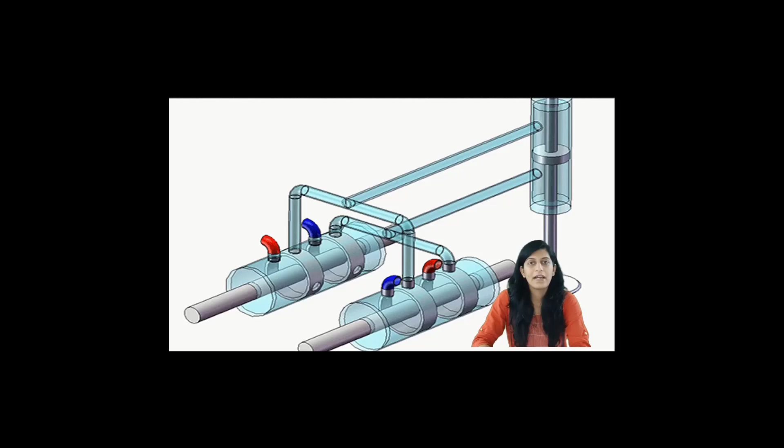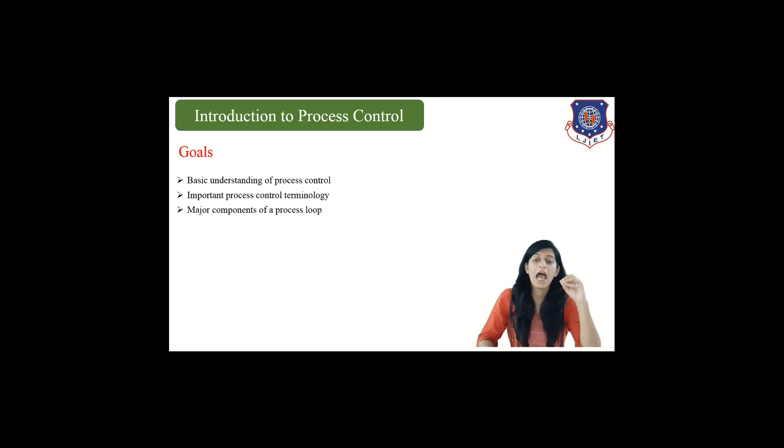Let's start our today's topic, Introduction to Process Control. First we must understand the purpose behind learning this course. Once you complete it, you will understand the basic knowledge of process control, important terminologies related to it, and the major components of the loop. These are the outcomes from this topic, so let's start today's session.

We are dealing with process control and instrumentation. The subject name itself depicts that it is a combination of two different topics: one is the control part and one is the instrumentation part. So we are here discussing initially the process control part.

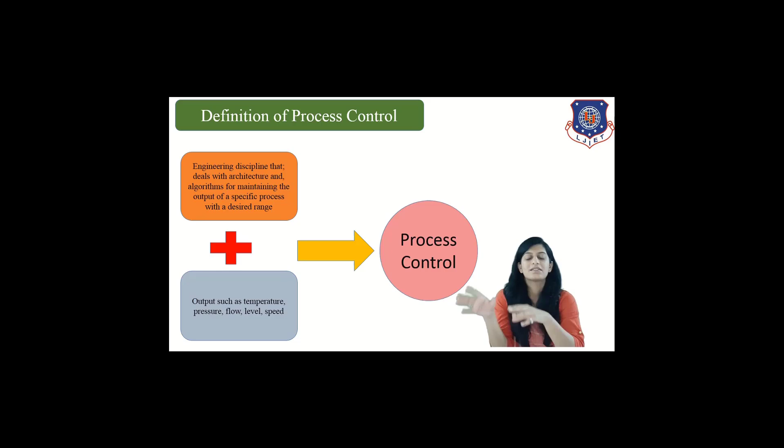What do we mean by process control? Basically, process control is a combination of engineering disciplines that deal with architecture and algorithms for maintaining the output of a specific process within a desired range. When it is combined with output, it becomes process control, meaning you are controlling your process based on some desired output. Output may be of various types - temperature, pressure, flow rate, liquid level, speed of reaction, anything. Based on that, when we try to control our process, it is termed as process control.

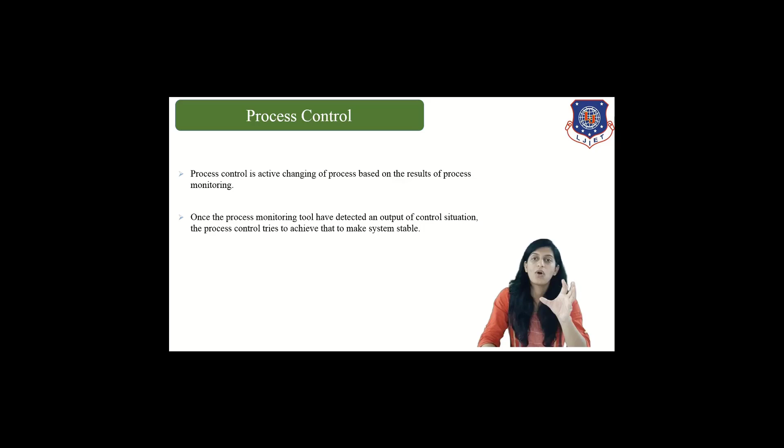Process control is the active changing of process based on the results of process monitoring. When we continuously monitor our process and each parameter changes based on the output coming from the process, that is termed as process control.

Why do we need process control? The basic need for process control is three important things: we need it for maintaining the accuracy of our process, for maintaining safety of the process and of our industry, and for stability of our process. So accuracy, stability and safety are the three most important reasons why we control our process.

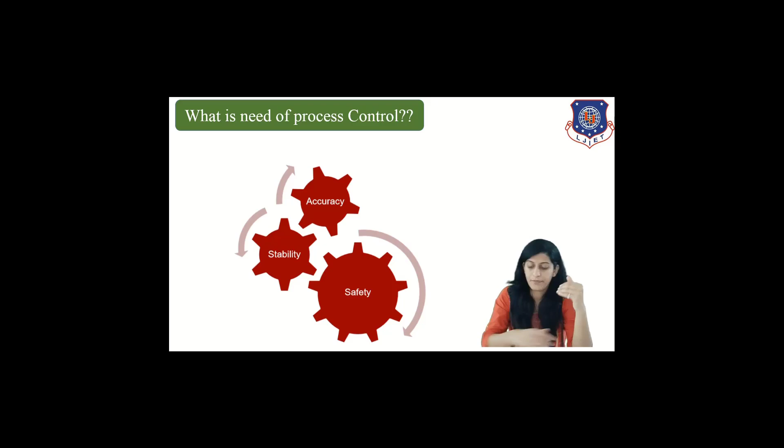Next is the need for control and automation. Why do we need to control and automate our system? The basic need for control and automation is safety. In a plant operation, especially when dealing with hazardous products, hazardous raw materials, or hazardous reactions, it is essential to consider safety as the topmost priority. For this, we need control and automation side by side.

Next is environmental regulations. When we install an industry, some amount of waste is generated, and this waste or effluent needs to be managed. For that, we need some control or automation through which we can know the amount and composition of waste going out, and how to decrease it.

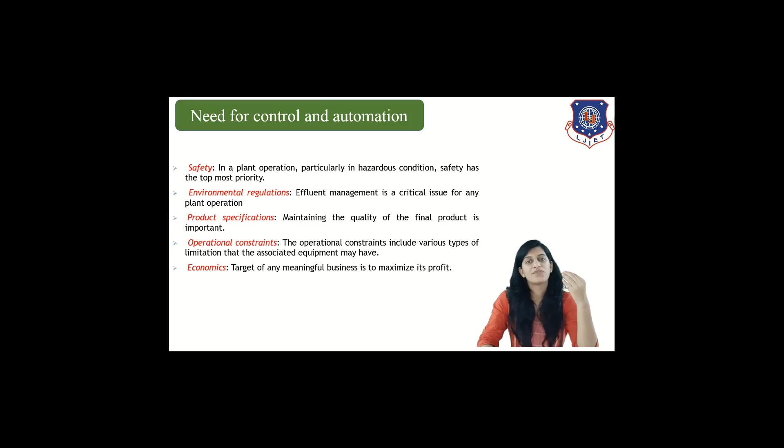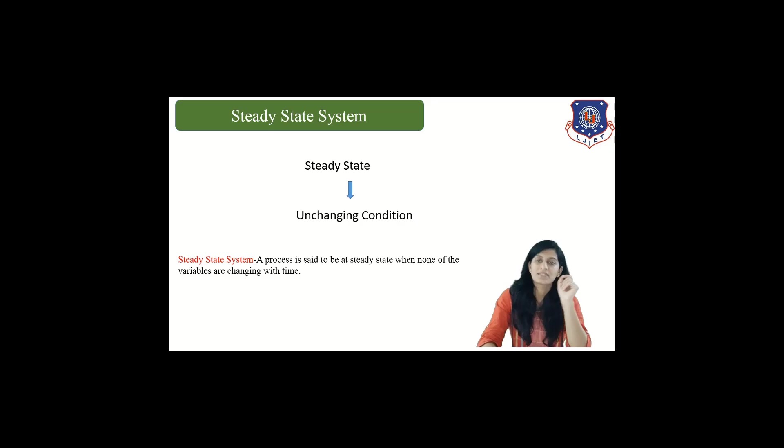Now coming to an important terminology, the steady state system. What do we mean by steady state system? Steady state refers to an unchanging condition. A process is said to be at steady state when none of its variables are changing with respect to time. Parameters can mean any variable - temperature, pressure, composition, flow rate, anything. If these variables are not changing with respect to time, the system is termed a steady state system.

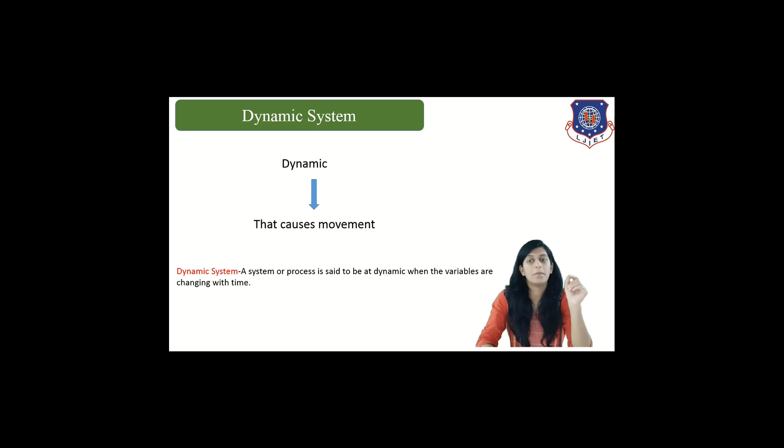Next is dynamic system. As the word dynamic itself suggests movement, a system or process is said to be a dynamic system when its variables or parameters are changing with respect to time. If parameters such as temperature, pressure, flow rate, composition, or any other parameter are changing with respect to time, such systems are termed dynamic systems.

Now let's deal with some important terminologies of process control. The first and foremost important terminology of process control is control loop. If you want to understand what is process control, we must understand the control loop. So what do we mean by control loop?

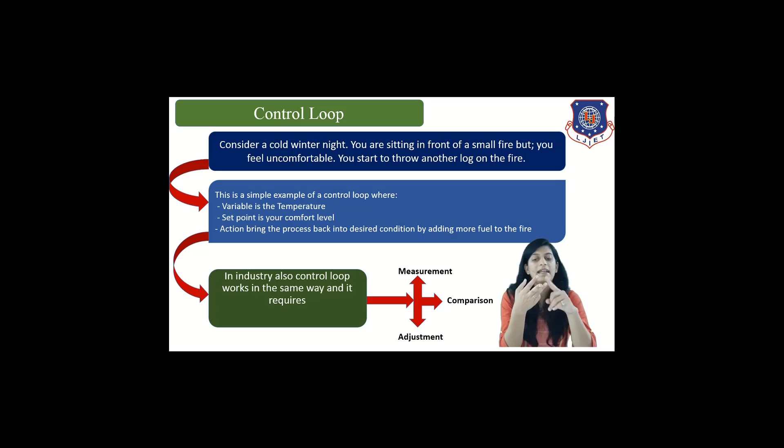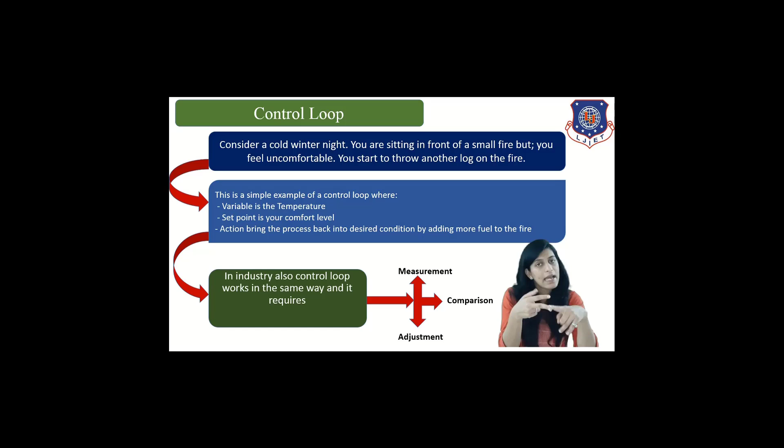Similarly, in industry also, control loop works, right? Measurement, comparison and adjustment, these are the three foremost parameters associated with control loop. We need to measure, we need to compare, and then we just need to adjust. So this is control loop.

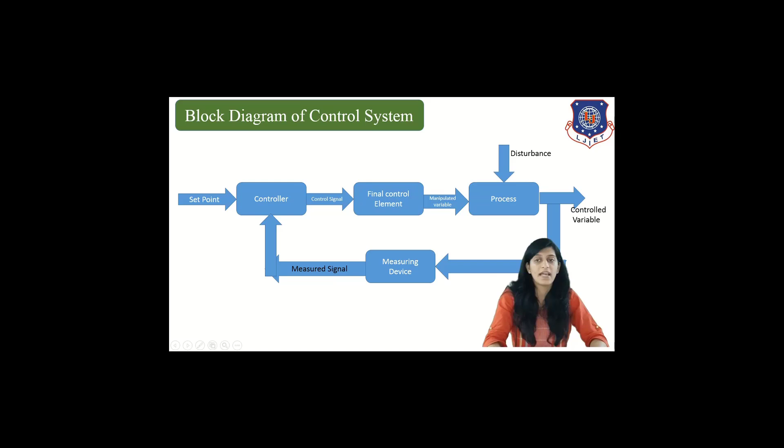That error is known as control signal. That error is sent to the final control element. This final control element will try to manipulate the error using some physical transformation, and then that signal is sent into the process, and finally we can get our output as desired. So this is the block diagram of a control system.

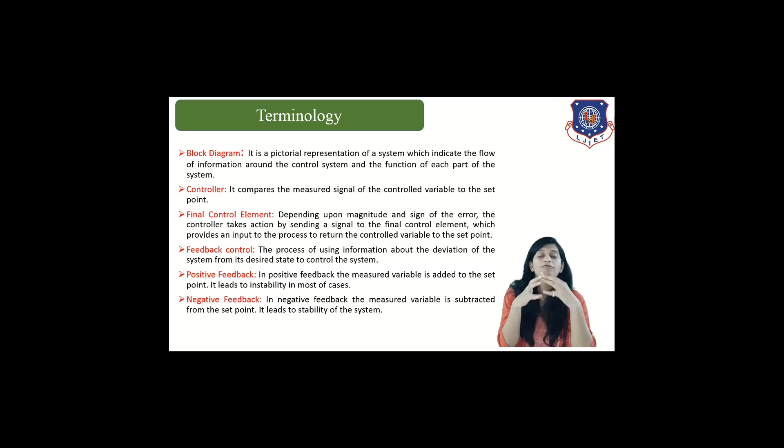Now, coming back to some important terminologies of control loop or process control. First is block diagram. As we have already seen, block diagram is basically a pictorial representation that indicates the flow of information around the control system. It will also show you the function of each and every part of the system.

Now, controller. Controller basically compares the set point and measured value. So the objective of the controller is to compare the set point and measured value or output given by the system. Final control element is working depending on the magnitude and sign of error which is being sent by the controller.

Feedback control is the process which uses information about the deviation of the system from the desired state of the control system. Whenever we are sending a stream of output back into the control system, then it is known as a feedback system.

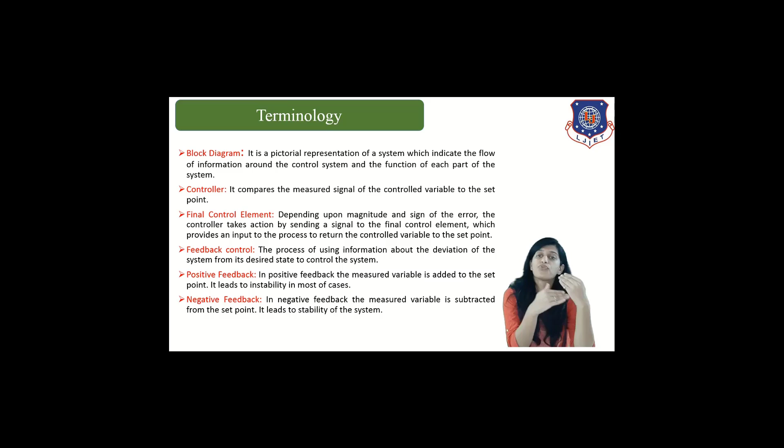In case of positive feedback, the measured variable which we are sending into the controller is added to the set point. So whenever we are adding our measured variable to the set point, it is termed as a positive feedback system. And in case of negative feedback system, we are simply subtracting the measured variable from our set point. So whenever we are subtracting the measured variable from the given set point, it is known as a negative feedback system.

Hope all the topics which we have covered today are quite clear. Thank you.